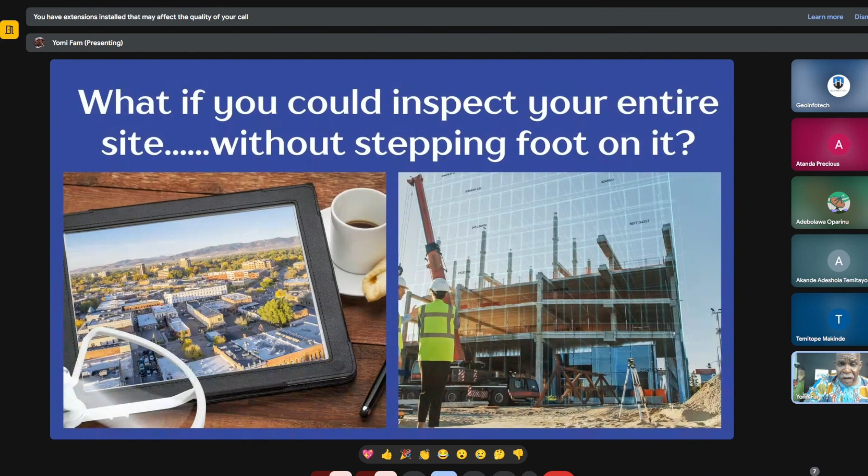Stand by. Okay, so basically here we have a slide of someone sitting in his office with a cup of coffee and what looks like a pastry. So what if you could inspect your entire site without stepping foot on it? I mean, that's every investor's dream, or every site manager's dream. Sit back, the drone flight is being sent to you live, and you can just basically see what's going on site.

Okay, so what kind of challenges do we face in construction in Nigeria? Very limited visibility of site progress. There are always delays, most times delays and cost overruns. There's safety risks on site. There's difficulty tracking material usage.

Drones can help fix all this, and we'll be going over a few of those challenges and see where the drones can actually come in and help out.

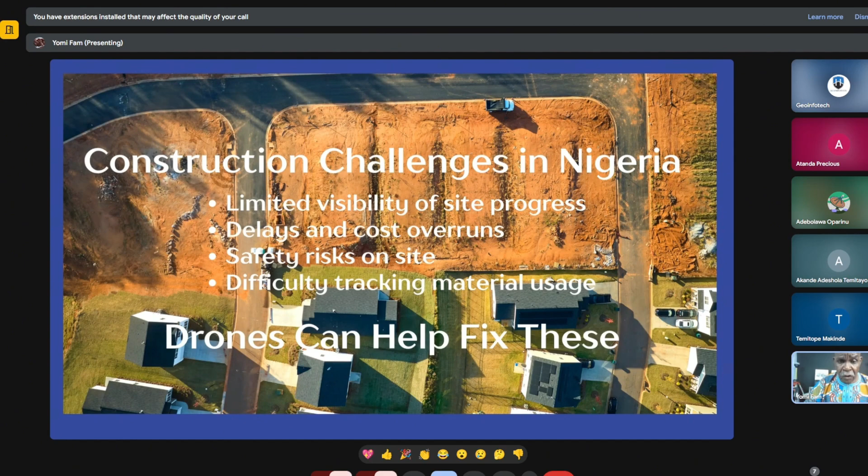Okay, drones are basically your eyes in the sky. What are drones? Drones are also known as UAVs, unmanned aerial vehicles. They capture high resolution images and videos. They fly autonomously or manually. Now, what I mean by autonomously is like you sit in your office, you get your, I'll be going over some of the apps that you're going to use for all these drone flights, something like DroneDeploy or Pix4D. Sit in your office, map your mission, preview it before you get to the site. Get to the site, put your drone up in the air, and the drone will automatically or autonomously fly the mission for you. But having said that, it's also very important that you manually know how to fly a drone, just in case when you get to the site, things change and your autonomous mission plan missed a few shots.

So while you're on site, you can go back and capture shots of those images that were missed. That's where the manual thing comes into play.

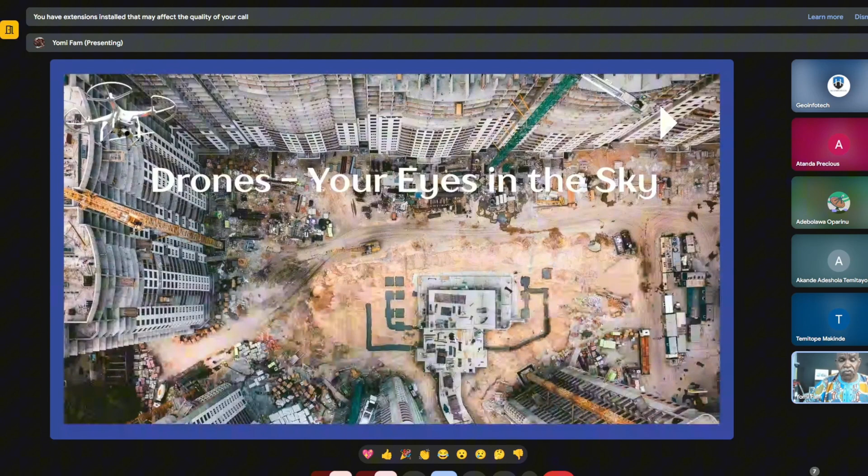Drones are equipped with GPS and high sensitive sensors. Drones are basically your eyes in the sky. I don't know how else you can get a view from that high out.

Where do drones fit in the construction site life cycle? You can have daily, weekly, and monthly site monitoring. You can do topographic surveys, take progress photos, generate 3D models, and do site surveying and planning.

You can monitor the progress on the site as construction goes on. You could monitor that progress. You could do material management. What do I mean by material management?

Basically, on the site, one of your contractors says he delivered 10 truckloads of gravel or sand, but he only delivered 9, or each truck wasn't full—it was like 90% full. Well, the drone is up there. You just have to make sure that when he delivers the gravel or sand, the drone's taking a picture of what's being delivered.

You could also take stockpiles after he's dropped off the commodity on the site. You could do centimeter precision measurements of, okay, this pile here yesterday was 2 tons worth of material. Today, something's been used, it's now 1.5. You can do that kind of material watching on the site.

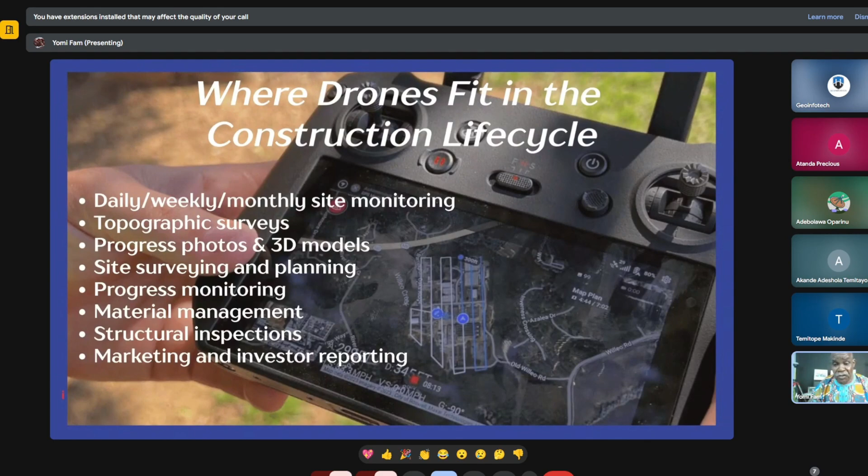You could also use the shots and deliverables to show the investors, okay, we said in 2 weeks' time we're going to get to stage B of the plan or the building, and you could show the investor, yes, we're on time. And if you're not on time, you could always explain to the investor why. One important thing you could also do is take the site progress monitoring.

As you can see on the slide, this is a drone taking a shot—looks like the foundation has been laid—and this is a before picture that you can show your team, the investor, or whoever needs to see what's going on site.

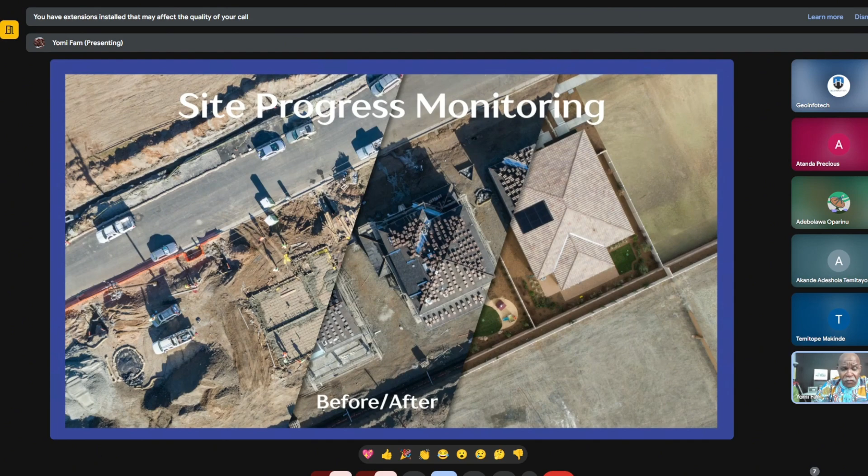You could also put the pictures side to side, showing the before and where you're at in the construction stage. It comes in very handy. 2 weeks ago you had the left half of the construction, 2 weeks later you're here. So it gives everybody peace of mind that the site manager, architect, or structural engineer is following through on what they promised.

Why use drones in construction? Key benefits: speed, safety, and accuracy. You get faster and more accurate surveys, improved safety monitoring, visual reporting for clients, and lower labor and inspection costs—very important for investors. If you can lower your labor and inspection costs, so be it.

I know for a fact that sometimes with really large projects, the owner of the building hasn't come out of pocket himself—maybe he's gone to a bank to get a loan. Most times, maybe not so much in Nigeria, the money is released in tranches. In other words, one week you say you're going to do X, Y, Z on the site. They will not release more money to you until you prove that you've completed that first part.

So that's where the inspection comes in, and by having a drone, it's practically very difficult for a human being to get into some of these inaccessible areas of a site, and pretty dangerous.

They are completed by professional building surveyors who are trained in building pathology. They capture detailed imagery of otherwise inaccessible locations. You get closer to the survey target, which improves the quality and density of scan. Completion is faster due to ease of access. They reduce health and safety risks. Very important, no plant shutdowns are required for a drone survey.

Most of the drones, although sometimes you have to get permission from the client and let them know you're going to be flying your drone over people. But the law does say that as long as you don't have a sustained flight over people, you're good to go. And you could do that while people are working, as long as they give you permission to do that and let them know what you're doing.

They provide a more thorough overview of a site. Don't need any explanation there. They are more cost effective than traditional surveys, definitely.

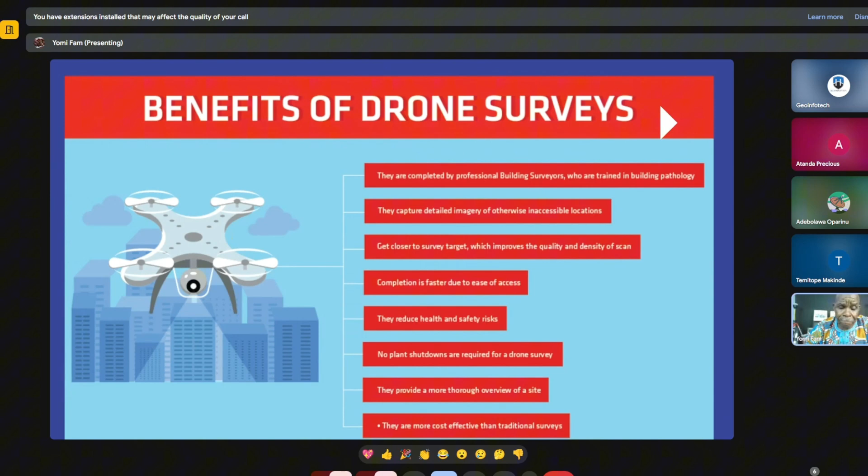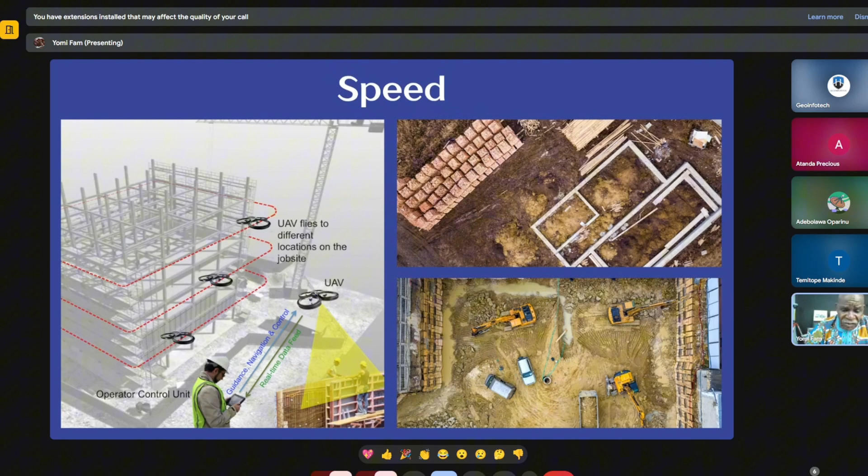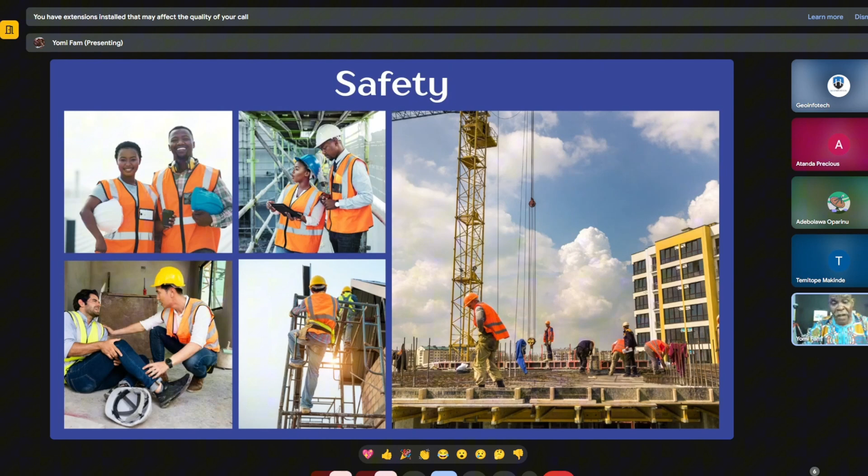If someone falls, or a brick falls on someone, at least you're covered in the sense that oh, all my workers are well equipped. They're covered. Wearing the right safety gear.

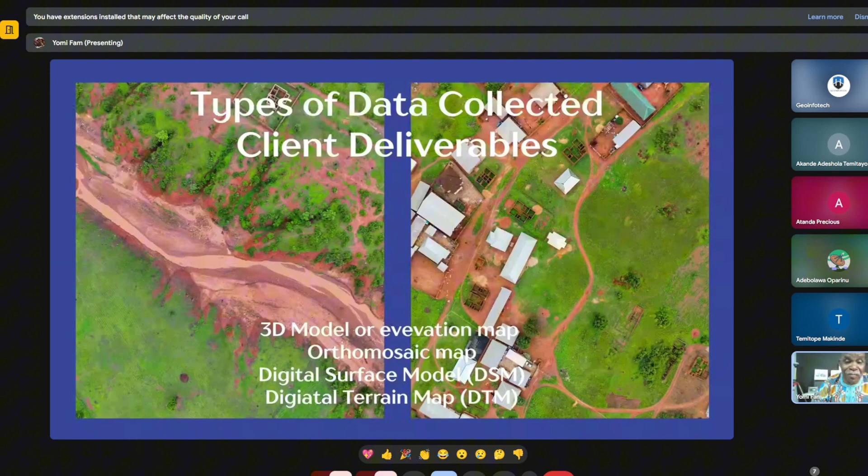Now, this is what they did on Niger State. They took all these maps, put it into the right processing software, came up with this that is going to be submitted to the authorities so that when they're planning in the future - a lot of homes got damaged, a lot of homes and lives were lost. So the authorities or whoever's going to develop this place can now take these maps and say, okay, water flows this way, this is where we're going to do our design, or this is how we're going to design the site in the future.

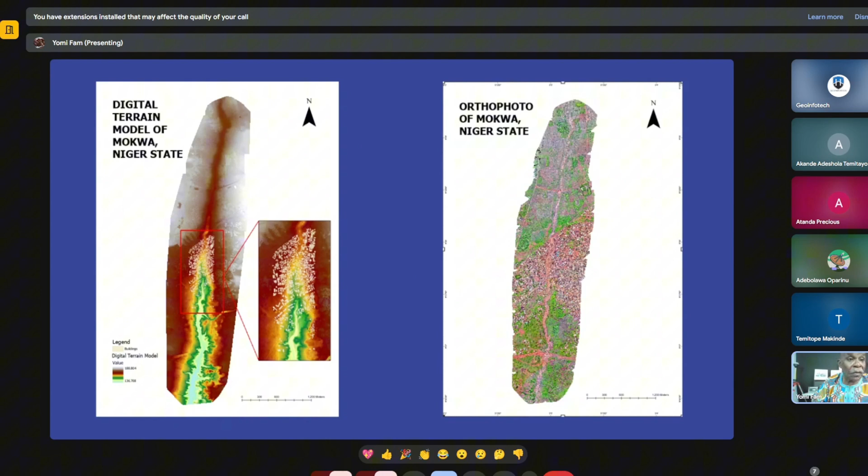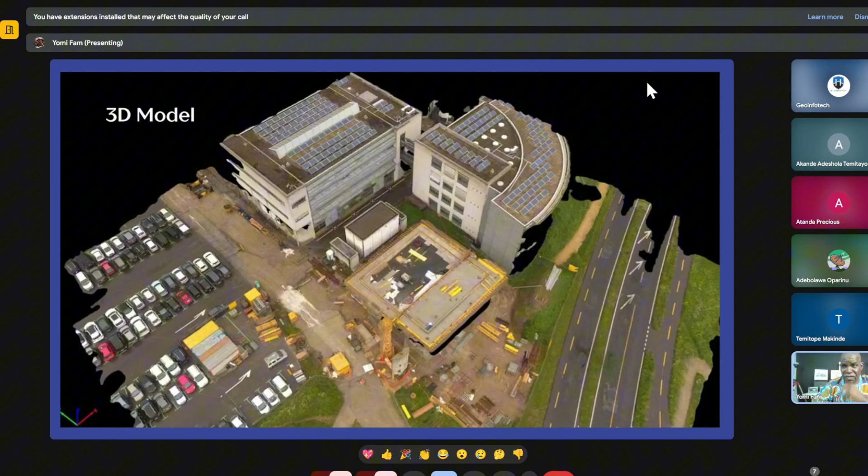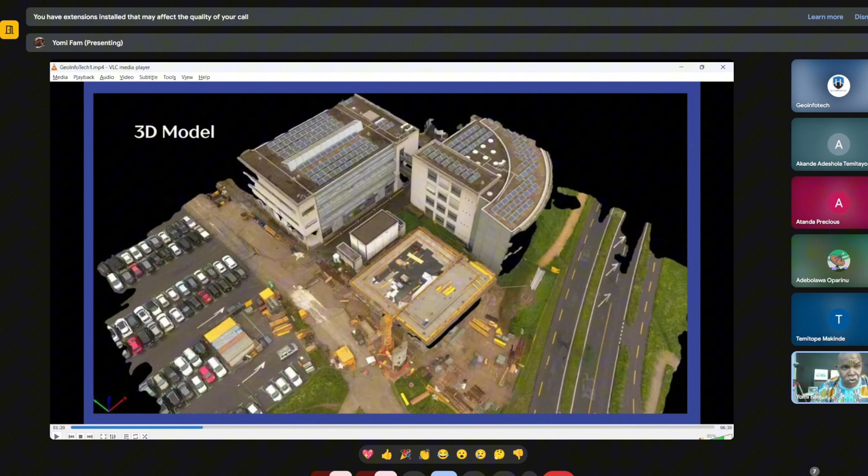So what's an orthomosaic map? It's basically you using your drone and pointing your camera straight down. Some softwares will say 0 degrees, some say 90 degrees, but basically it's pointing your drone camera right down, so you don't see the sides of the building. It's just taking everything from straight above.

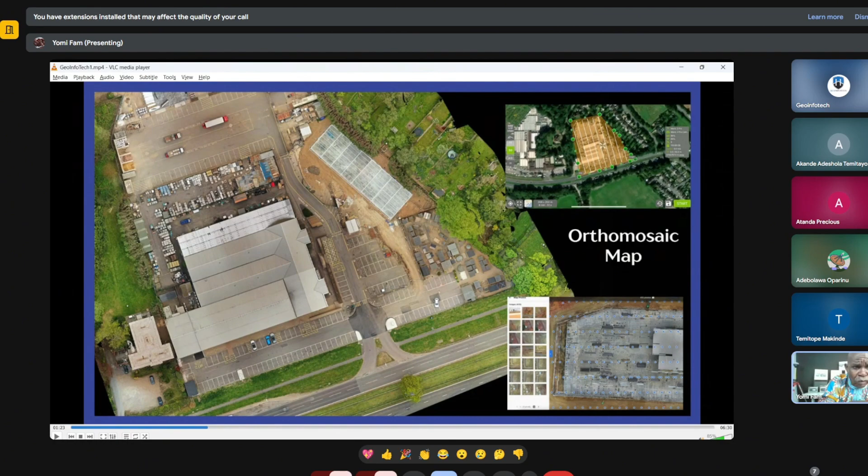If you look at the bottom corner - no, let's go to the top. The top part of the slide shows the mission plan. Again, I think I've spoken to you about what a mission plan is. And the bottom right shows where all the photos were taken. Those little blue dots are where images were captured by the drone.

At the end of the day, depending on how detailed your client wants your mosaic map to be, you're going to get several photos like the ones on the left. The ones Geoinfotech did a couple of weeks ago for Niger State - they did in excess of 400 photos, and all those photos had to be stitched together, and that's how they were able to come up with their maps.

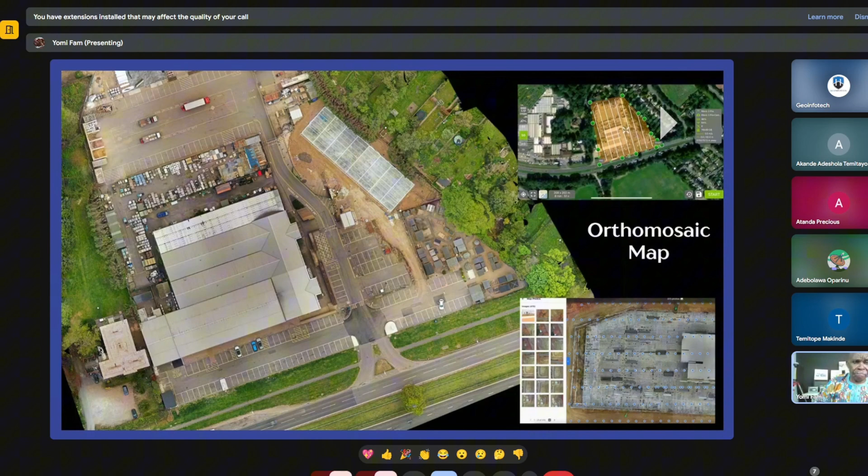Okay, moving right along - technology behind the scenes: drones, survey equipment, and software. So basically, whether you're getting into the business, already in the business, or looking to talk to Geoinfotech to see how they can assist you with your project - if you're just starting out, I'm not going to sugarcoat anything and tell you that it's pretty cheap. Of course you can buy one of those cheap drones, but is the cheap drone going to do the job for you? I do not think so.

So basically, all the drones that we use here at Geoinfotech are also RTK equipped. RTK is real-time kinematic - it's basically you taking detailed pictures of what's going on on site. Now, the experts say you should always combine your RTK with your GCPs, which is the ground control points. That's the best way to get your precision, or centimeter precision, maps.

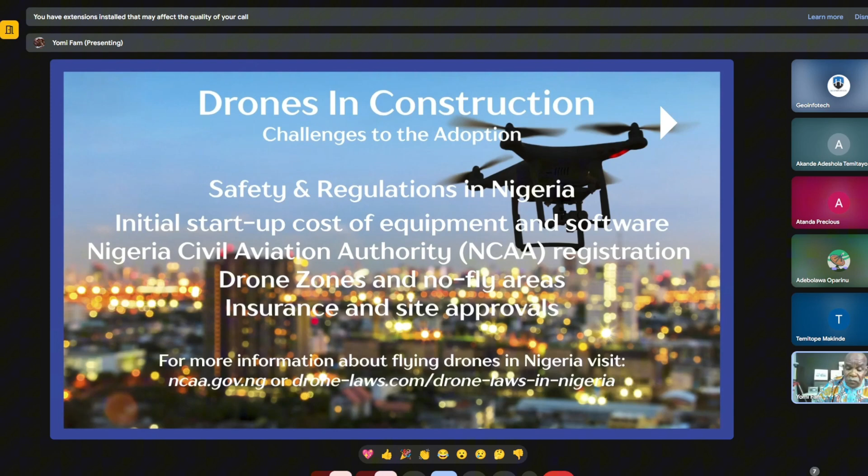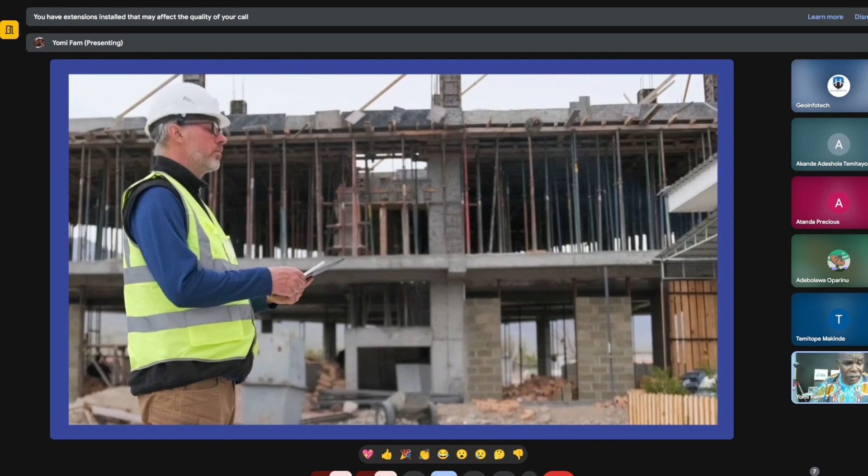I'm practically rounding up now because I don't want to keep going on. I could spend days talking about this stuff, but I've kind of just summarized it. Again, all this stuff that I'm talking about is going to be recorded, and you'll have a chance to review it in your own time. And if you have questions at the end of the session, we'll be more than happy to answer those. Plus, you can refer back to the webinar and then follow up.

So this picture here practically doesn't have anything to do with drones, but just watch. This is a guy on the site, and what is he doing? He's taking notes, old school guy taking notes. But watch his face at the end of the clip. That doesn't look like somebody that's too happy about what he's doing. I am yet to find a drone pilot that doesn't have a smile on his face, because it's not easy work, but it's enjoyable because you can actually see the fruit of your labor. This guy here, oh no, I wouldn't want him to be my site manager.

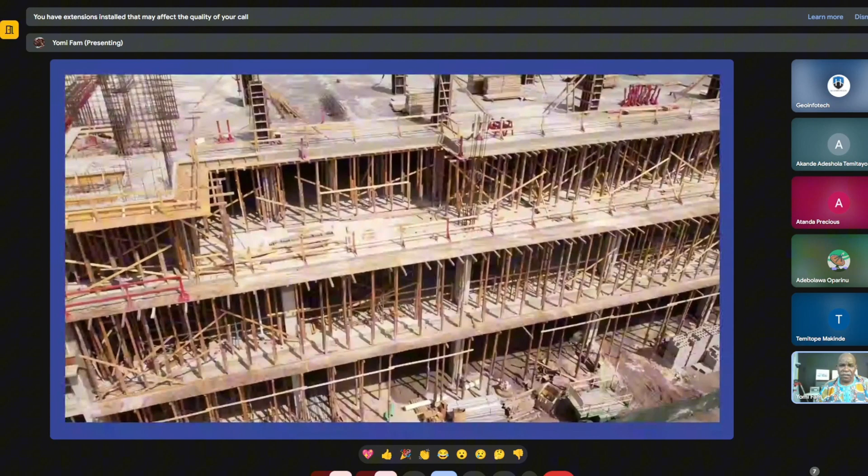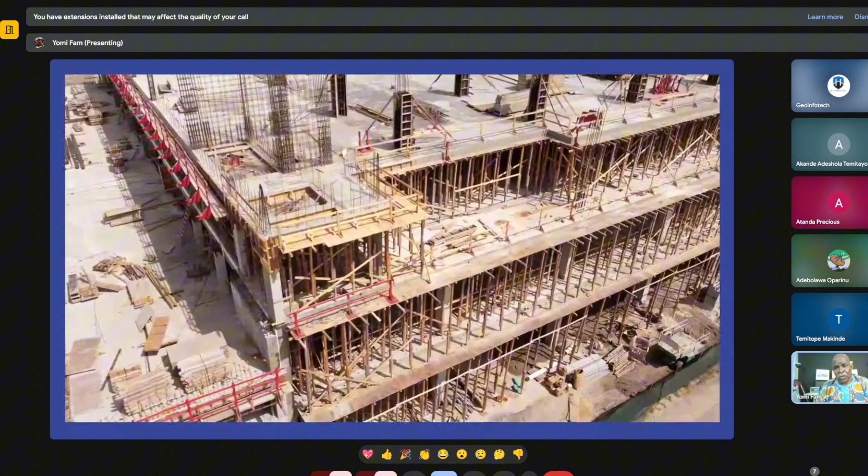Moving right along, we're just showing drone shots of construction sites. Now, I don't expect all your sites to be this large, but who knows? With Geoinfotech behind you, you can do everything.

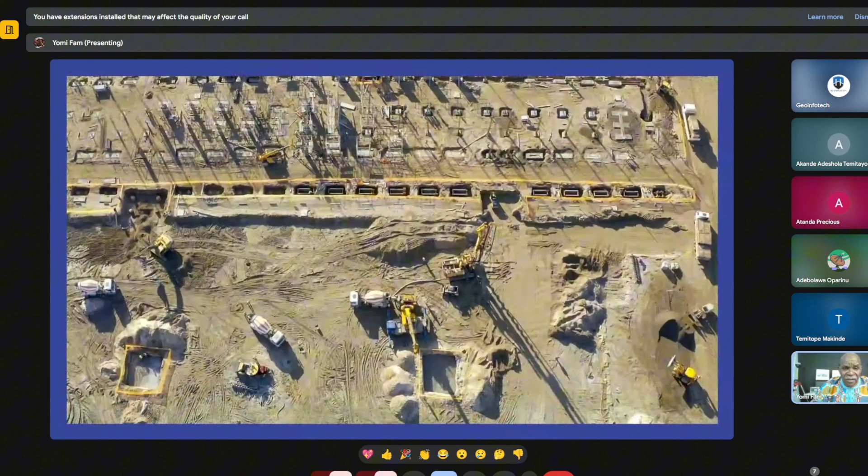This is a site where you practically see sand or gravel piles. Now, if you're using GCPs, or RTK drones with RTK modules on them, you can actually take measurements of stockpiles. So your site manager says, 'Oh man, we're running out of sand, or we used up half of the sand we need for the site.' You can always go back to some of the progress reports or progress pictures that were taken when this stuff was delivered.

One week later, there's only 50% left. What exactly did you do with the 50% of the stuff that you claim you used? Those kind of questions.

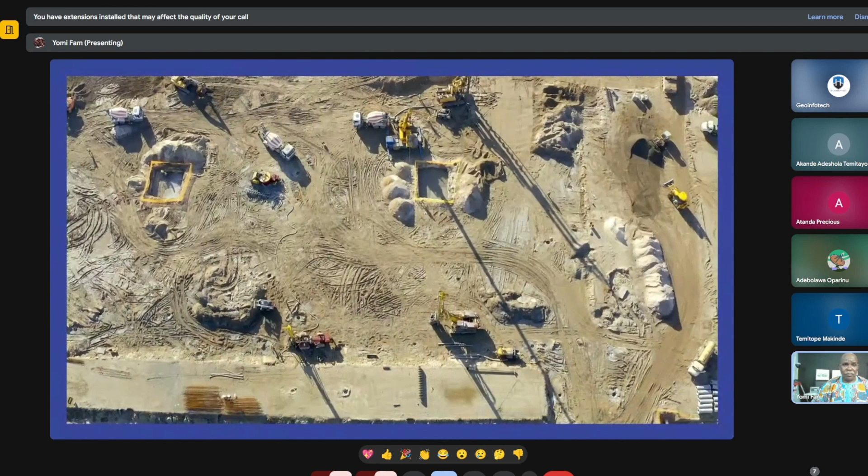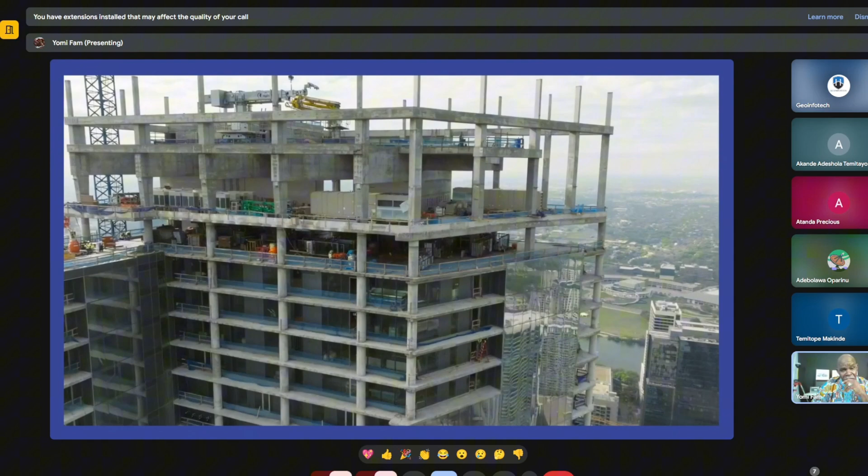So that's basically showing what's on site, the pre-construction. They've already started laying out some slabs here. This is another big one. I don't know if you could imagine monitoring a site like this, having individuals do it manually. Well, you might have to, if your company is rich enough, get a helicopter to take these shots. But basically, with drones, you could do anything.

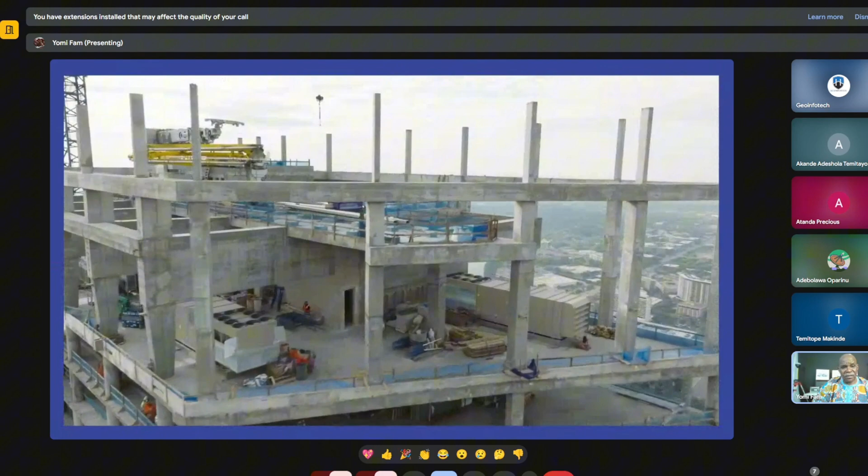Okay, it's basically zooming in, and going around and showing you what's going on. Isn't that a beautiful shot of what these drones do? Here also, you can see what's going on.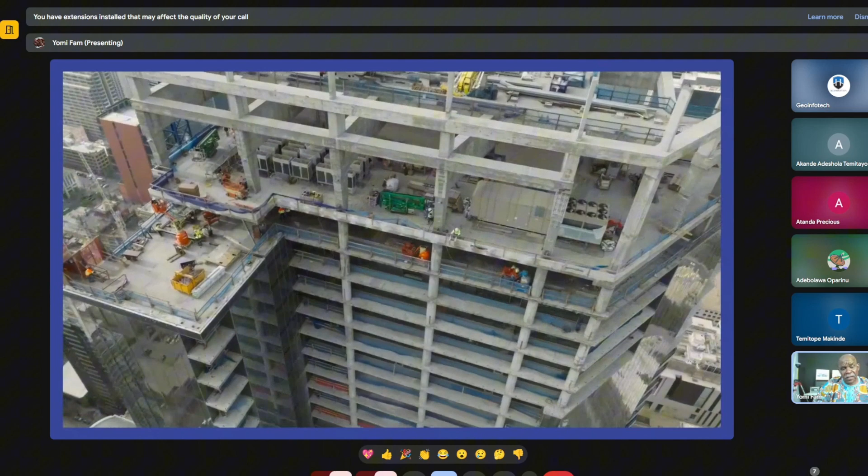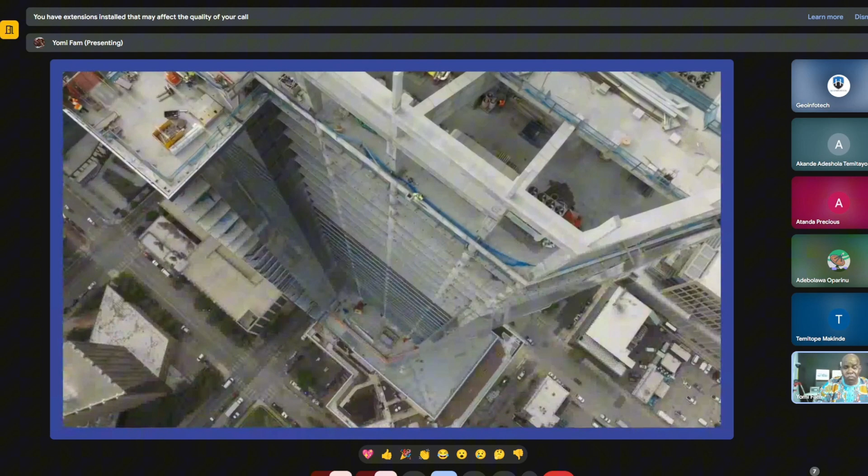Oh, by the way, we're taking shots of the exteriors of these construction sites. If you need to see what's going on the inside, we could also do that at Geoinfotech. Lots of drone pilots only take shots of the outside of the building. We can also take shots of the inside, so you can make sure that the pillars or columns or whatever structural stuff out there is placed right, the right width, that kind of stuff. Okay, so you can basically see all the AC units or air units, where they're placed right.

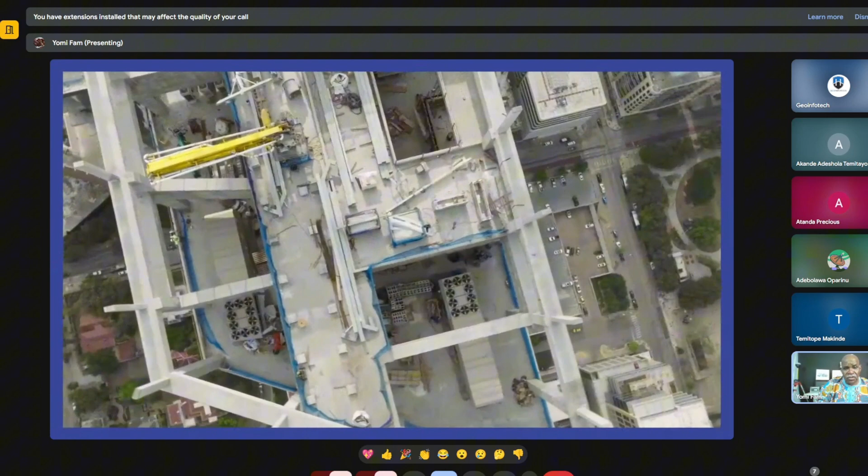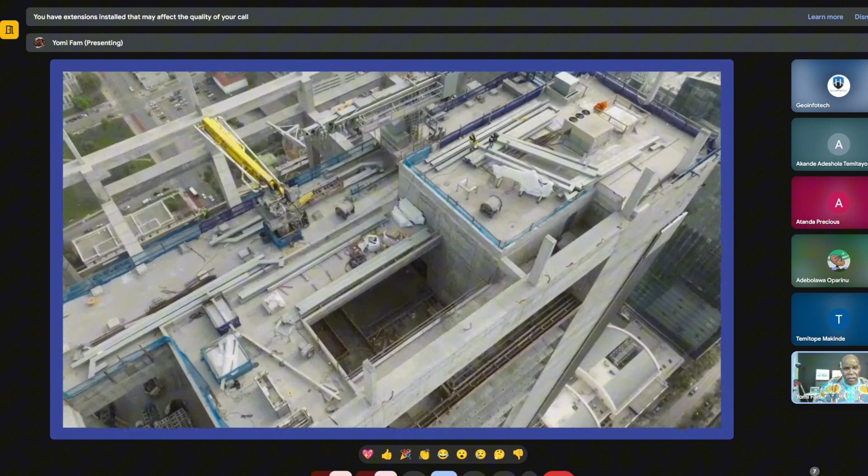Okay, so that's basically it. We're coming to an end, so please bear with me for a couple more minutes and we'll be done with my presentation.

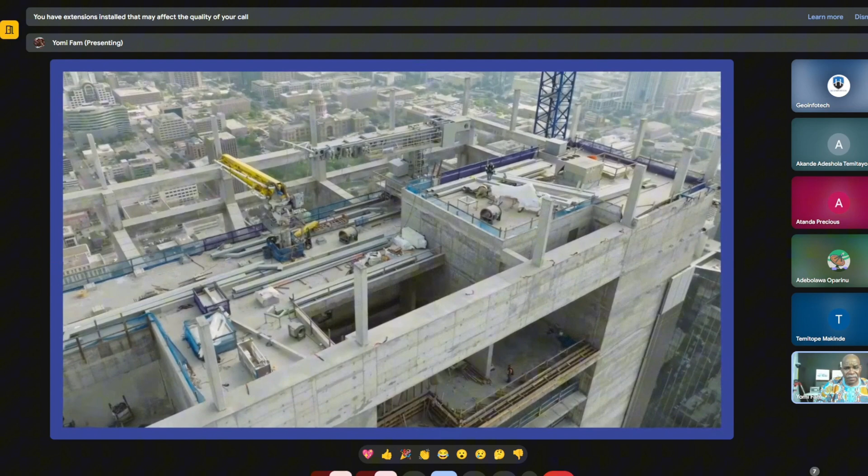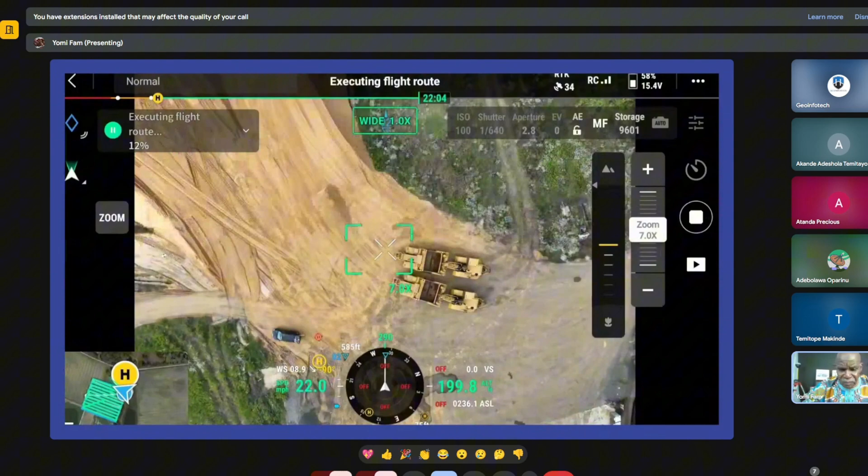Basically, this is a site, and I left the audio on this one because you hear this. Hold on a second, trying to get this. You hear those clicking sounds? That's the drone taking pictures at precisely predetermined spots on the site.

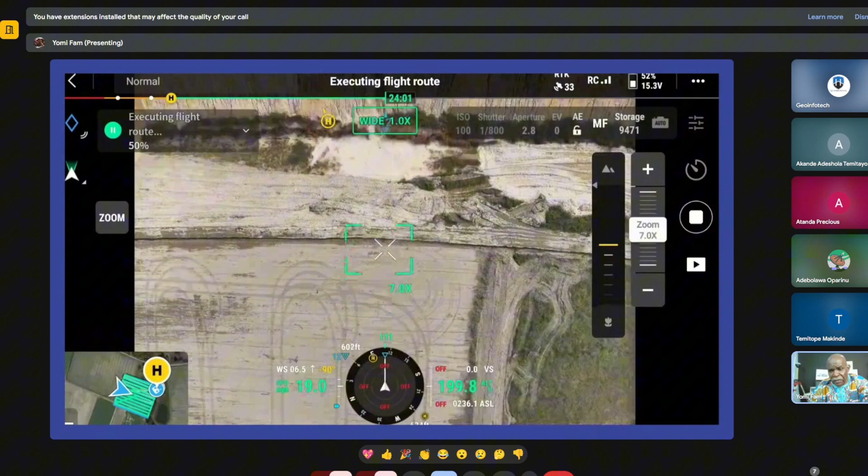If you look at the bottom left corner, that's one of those mission maps that you've already pre-planned. So basically, you get out to the site, put the drone in the air, and watch what happens at the bottom left. The drone is taking pictures at maybe every 1 second. Watch what happens now. As the drone turns, you see it's still following the pre-planned map and it's taking pictures along the way.

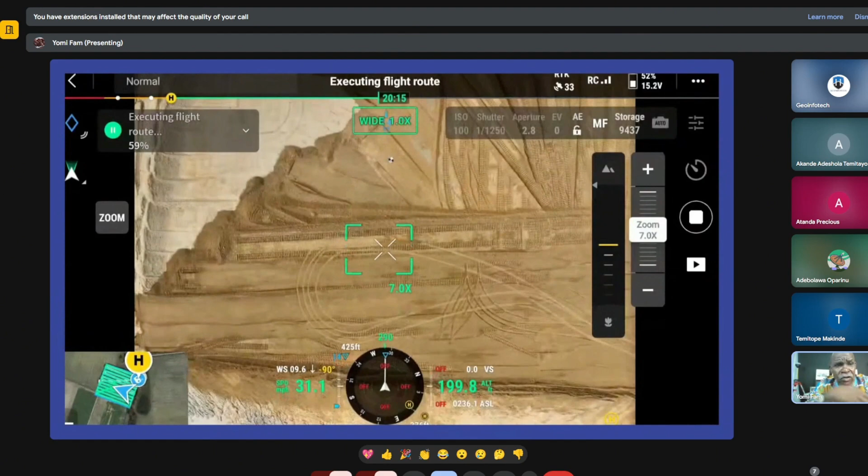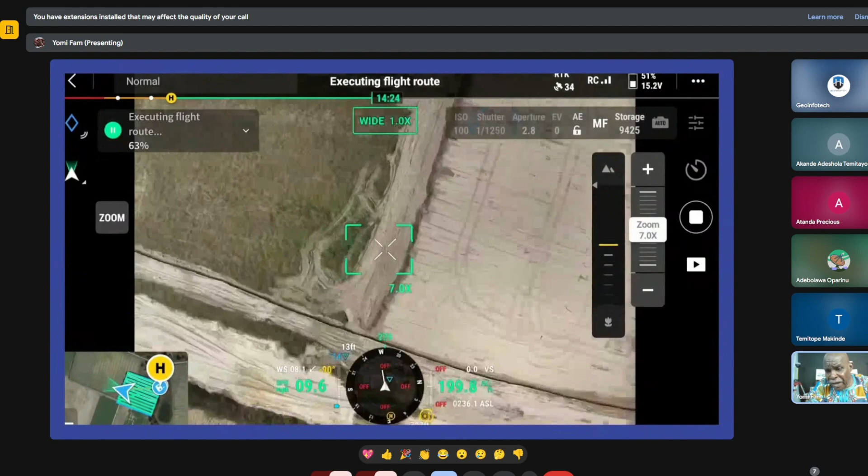Now, I'm not going to finish all this site, but as you can see, in this particular software, it's showing you how much of the pre-planned map it's done. Right now, it's at 57, it's at 58%. And so basically, you can control everything that's going on in your data capture software. Okay, so I think I fast-forwarded it a bit because I didn't want to bore you with this, taking you through the whole 100%. We're at 66, it should be coming to a closing.

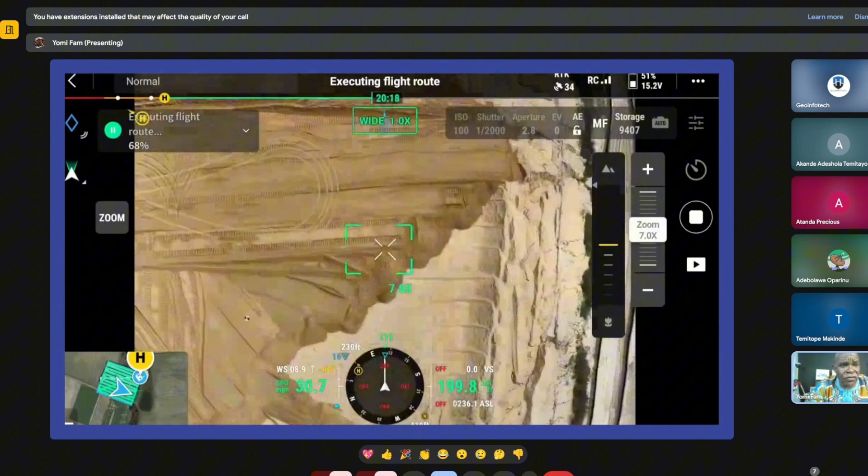So basically, look around the screen and you can see all the settings that are going on that you preset on the drone. And as the drone is moving, it's taking more pictures. I basically take my pictures every 2 seconds, but it's basically up to you. If you want to create 1,000 photos, that's up to you.

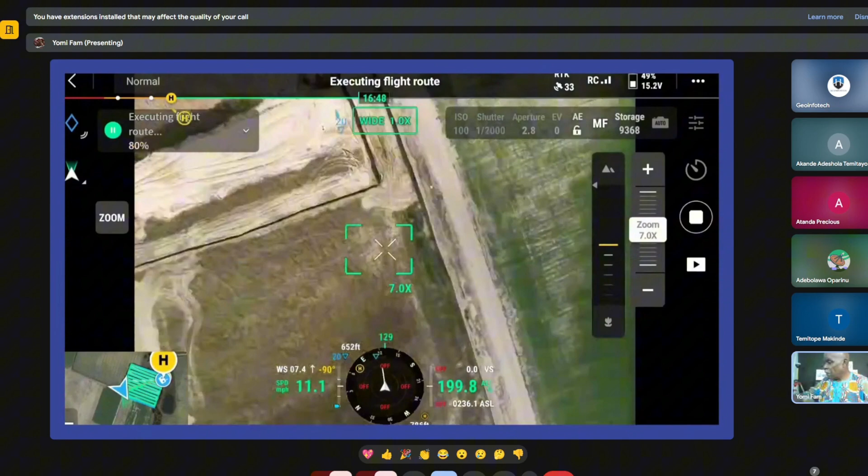Yeah, I'm going to be rounding off in a minute, so I'm going to fast forward this a bit. We're almost done, we're almost there. It's coming to a close. We're at 95%, and at the end of the mission, let's see what happens. 97, 98, 99. It's going to say something.

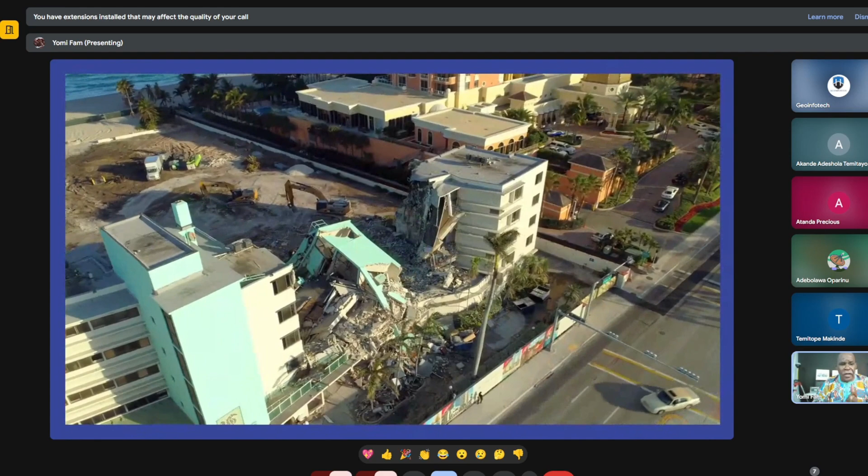There you go. Here is a site in California that was damaged by earthquake. They want to rebuild, and at the back of this collapsed building, they want to put on some other structure. So basically, your drones can go out there, determine what the damage was, and then report back to the developer on the extent of the damage. Okay, that's right by the ocean.

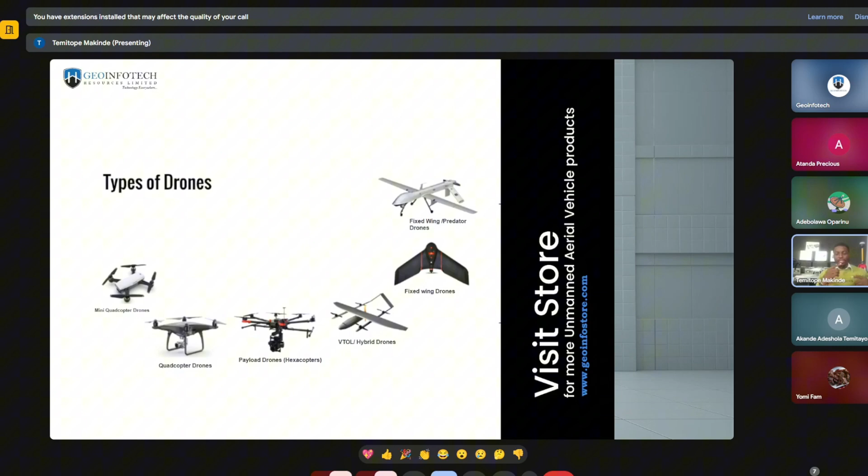Then we have drone and sensor. This is where a lot of drones are used for different purposes, different missions. We have the electro-optical camera for high resolution visual, and the infrared, which is for heat signature.

There was a time we were surveying a site just to detect areas that has high level of heat signature. You can't use that with RGB or normal photogrammetry, because you need a different payload for that.

Then we have the multispectral sensor, which is very good with agriculture areas, whereby you can check the health of the crop. Then we have the hyperspectral sensor.

Hyperspectral sensor is not common. A lot of us don't really see that in markets. This provides spectral data for material identification, and this is some of the things we'll be diving into.

And we have LiDAR. LiDAR is best for detailed mapping, especially where we have forested environments, so that you can get the bare earth surface while you still have tree and vegetation cover at that area.

They have GNSS. This is also a system embedded with the drone to ensure precision while capturing your data, so you don't have to capture data without precision. As you're capturing data with the GNSS receiver, it gives you more accuracy to your data set, so you're getting good data sets while also getting correct precision.

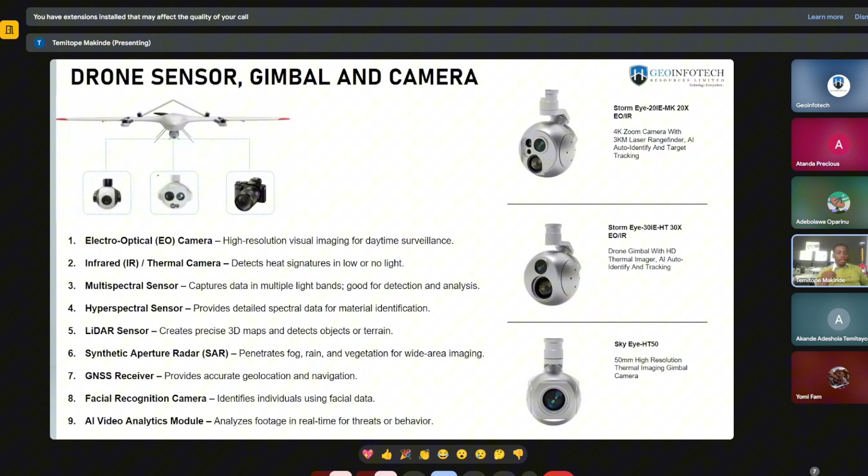And we have the AI video analytics module. We've recently seen it in the Matrice 4, which is bringing in AI system into the drone, whereby it makes the drone smarter. A lot of people are doing a lot of AI stuff, and this will actually increase the value of this hardware itself.

So I'll be listing a lot of drone data sets that you'll be getting for the mining sector and also the construction sector. One of the common data sets is the elevation models. The elevation model helps you determine the topography of that site.

This model is in the format of a raster, more like an image format. We have the DTM, the digital terrain model, and the DSM, the digital surface model. The difference is that for DSM, if you are getting an elevation model, you are getting elevation of man-made features and earth features, like the elevation of trees, buildings, and any other object around the site.

But the terrain model gives you bare earth elevation, just elevation of the earth surface, excluding the buildings. So in case you want to demolish a lot of buildings and don't want to waste money demolishing areas that are not really necessary, you can do the DTM. It will give you the elevation of the area excluding the buildings, as if there's no building there.

While the orthomosaic is just the true image of the site, mosaicked into a single image. I will give you an example of this as we proceed.

Then we have the true image of the area, more like the map of the entire area. Just assume you have Google Earth imagery, you see everything within that site, but this one is in the form of a drone image.

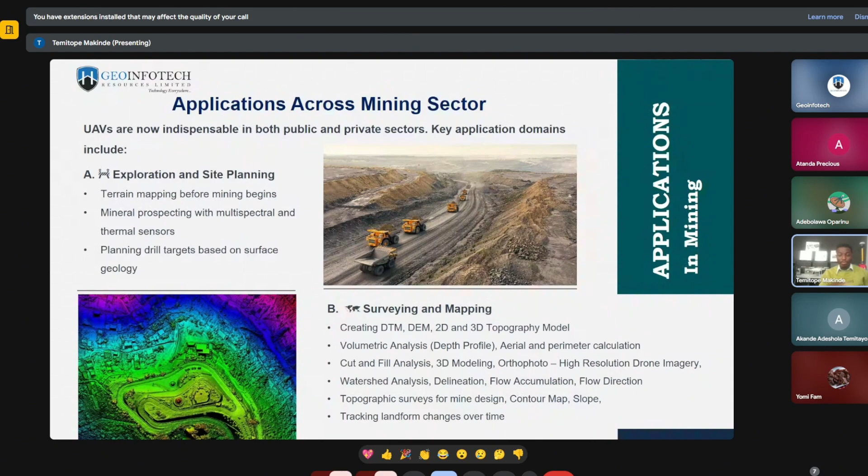Now we have stockpile and inventory management. This is one common part within the mining sector.

You can see here we have previous data and calculations whereby we brought in past projects, processed these data sets, analyzed them, and calculated the volume of this pet coke. Pet coke is a raw material commonly used for cement, and is more like a waste product of petroleum. They use this in combination with other minerals to get results. Without you going to the field again and spending hours, these data sets can give you a lot of information, including the analysis calculating the volume.

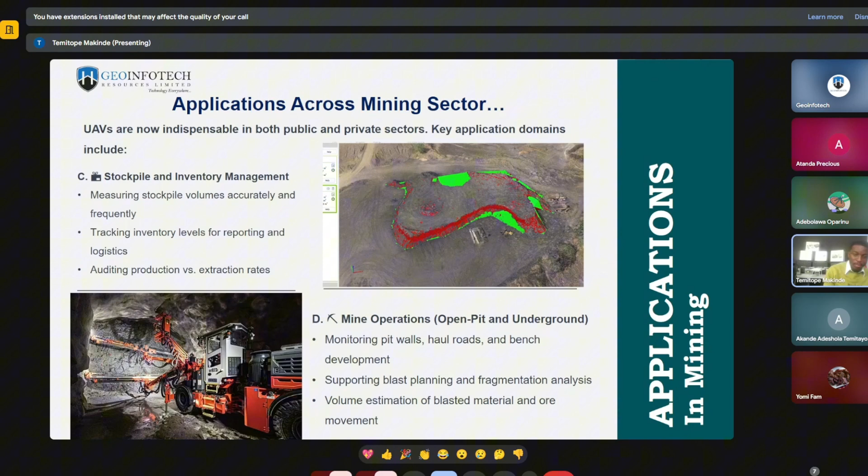So you can measure stockpile volume accurately and frequently. With this, you can know how much volume is remaining in stock, and know if you've not been cheated. In the office, you can calculate this with a simple tool, the Pix4D. You can track inventory levels and reports, and also compare with logistics.

Then we have mine operations. One thing about mine operations, especially underground, is it has high intensity for risk. You can send a drone to survey the entire mine and create a 3D model, understanding the terrain before going in. This lets you monitor pit walls, haul roads, and bench development. You can also support blast planning and fragmentation analysis, and calculate the volume estimation of blast materials and ore movements.

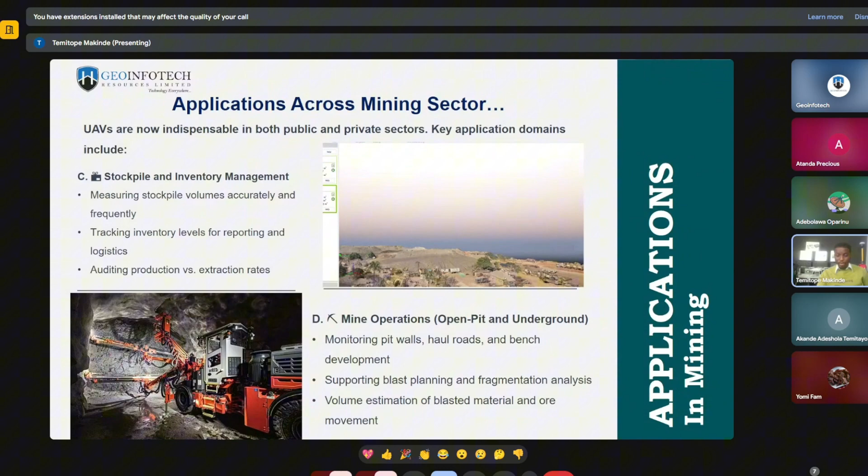The next thing we have here is stockpile and inventory management. It's related to what we did before. You can use this for calculation of different inventory levels and also for auditing reports within the organization.

The next one is environmental monitoring and waste management. With this, you can inspect different cracks and seepage, deformation, or monitor rehabilitation efforts and vegetation growth at the site, and study water quality within that site. A lot of things this drone can do for you without being in physical contact with it.

One important thing to notice is that you can get results of about 15 surveyors or GIS field workers on site using just a drone. Anytime you're flying a drone, you just need a co-pilot and a person in command, the main pilot, or the visual observer. You have a visual observer, a person in command who is the pilot, and maybe a person manipulating the control. So you have three guys capturing detailed information on site, and this is transformed into a digital copy or digital data set that can be used for multiple results.

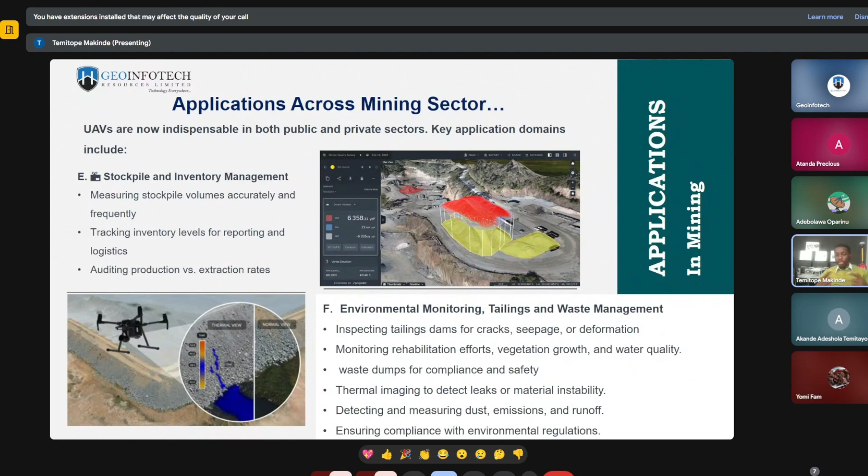Then we have infrastructure monitoring. You can monitor infrastructure over time to see development, and with this you can also study if there's any mistake. Without monitoring and archiving these data sets, you can't really tell what happened before. Understanding this can also help track the development level and predict the level of completion. There's an analysis where you can study what has happened before over time, and also understand what will happen next. Based on the timeline of the project, you can identify where damage and maintenance needs attention without shutdowns, and you are working with precision and being smart at what you do.

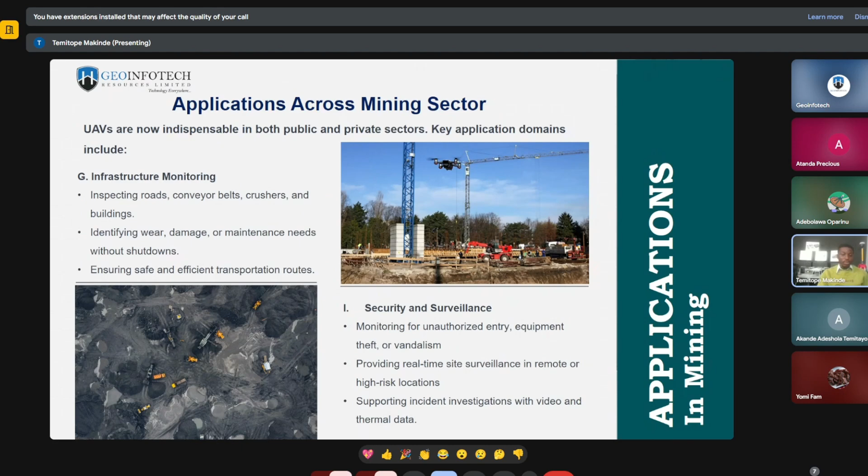LiDAR comes in place whereby you have to get detailed volume calculation, especially when you're doing 3D modeling. LiDAR is very useful in that aspect.

Then this is the last one, which is safety and risk management. You are limited to where you can reach, especially when engaging yourself in the mining sector.

It's just like the masts. You see a lot of people climbing masts just to inspect a particular wire that is not connected properly. But with a drone, you can just send it up there with a very good camera resolution that can zoom. Not all drones can zoom, so you should know this. There are drones built for a specific purpose.

Drones that can zoom are mostly for inspection. Do you understand? Drones with automatic and manual focus and mechanical shutter are very good for mapping. They're also embedded with GNSS and RTK. They are very good for mapping, and you have a lot of them like that.

But a lot of people get confused. You get a drone that you see people using for content creation, and you also want to use that for mapping. You're not just endangering your drone, but you lack in quality. The results and reports you get from that drone will reduce in quality.

For health and safety and risk management, you can send this drone out there, especially in small holes or big holes. You can send it out there before you go in to inspect, to be sure it is safe before you can go there.

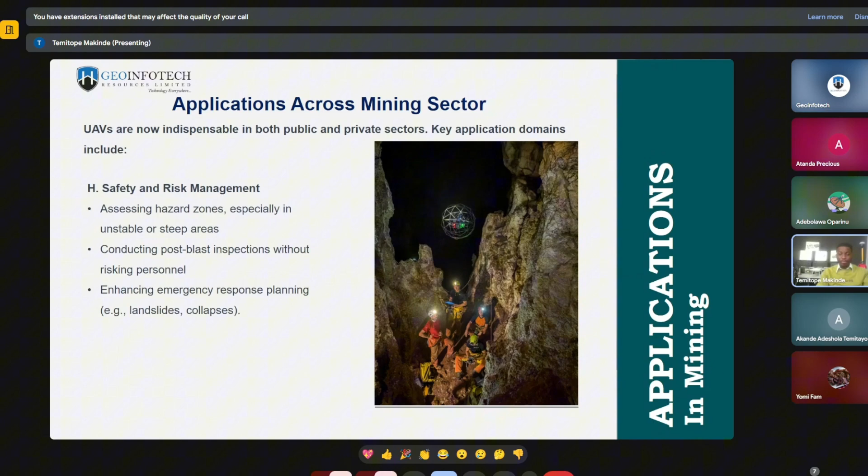So we have technical teams, especially when going to sites. Now, this is for those operating a drone department. You should always have a drone pilot and a security team. It's not everywhere you go that you just assume the drone pilot is safe with the drone just because he has it with him. You should always have a drone pilot with a security team.

You should have a technical support engineer in case there's any glitch on site. And you should have a compliance and safety officer. You should also have security and operations managers.

We also have other teams at Geoinfotech, whereby we have data analysts and GIS specialists, command operators, drone maintainers, and IT and network administrators. We also have security operators, managers, and emergency response personnel.

And this is me telling you areas you can fly and areas you cannot fly. In Nigeria, especially if you are familiar with DJI, there are areas you can't actually operate this drone. DJI has it embedded that you can't fly in restricted zones, especially close to airports. So anytime you're flying, always make sure you check the map, check the areas you're flying, and be sure you are safe to fly within those regions.

This is also telling you you're not allowed to fly at military zones, government buildings, or villages without warning. Especially airports, power plants, and prisons without warning. So as much as we're telling you drones are useful in this sector, we should also let you know there are some areas you are not meant to fly. Even if you are going to fly a drone there, you should let the people around know that you are coming to fly.

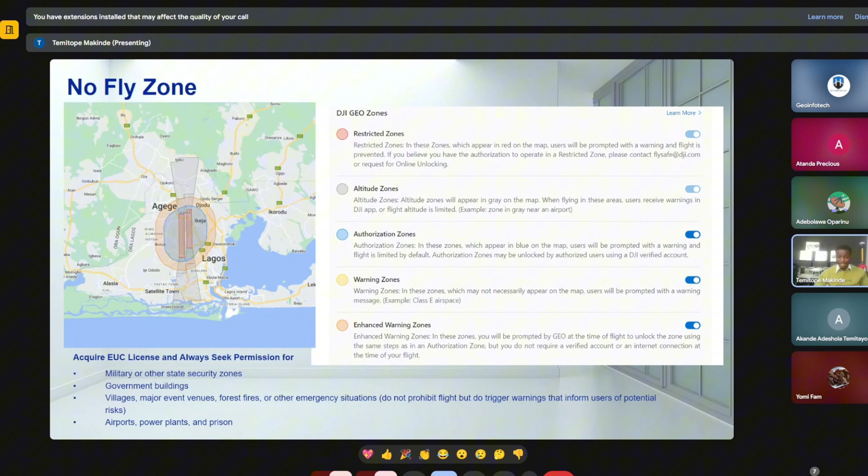So as much as this drone is very good, you can fly with this, you can do a lot of stuff, you can get a lot of data sets, trust me, 95% of drone operation is done with planning. Telling you, 95% of drone operation is done with planning. You plan the areas you want to fly, you check the weather.

You must always fly with the right direction.

If the weather is good, you should also know what is the tallest building or tallest object around there, for safety. You should also check if there is any prison, police station, post, army barracks, and all of that. Trust me, you don't want to get your drone into any of those.

So you should do a lot of checking. A lot of maintenance with your drone is very, very important. Check your drone, and one last thing, you should check the camera settings. Trust me, you can go ahead and fly your drone, but you might be flying and flying without checking the results you're getting, and you'll have wasted a lot of time. What we're bringing to you is time management, reduced costs, and quality results.

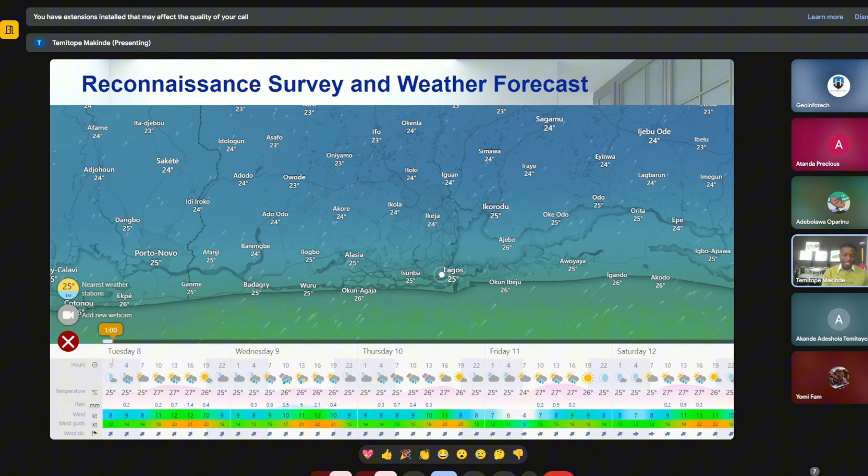If you're having any issues with your drone, trust me, make sure you get a drone that has return to home. There are a lot of drones out there without this functionality. Get a drone with return to home.

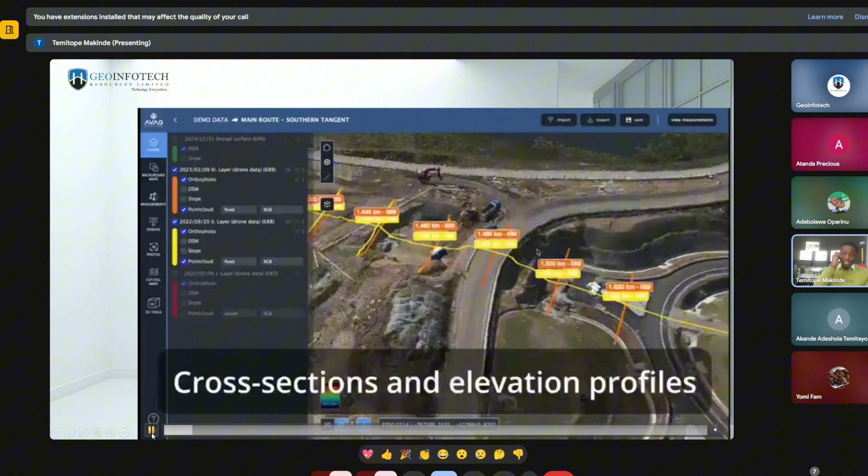This is another result you get from a drone - these are cross-sections that give you an idea of the elevation of that site. With this, you can understand the topography, understand what you can do with it, and understand the flow and pattern around the site.

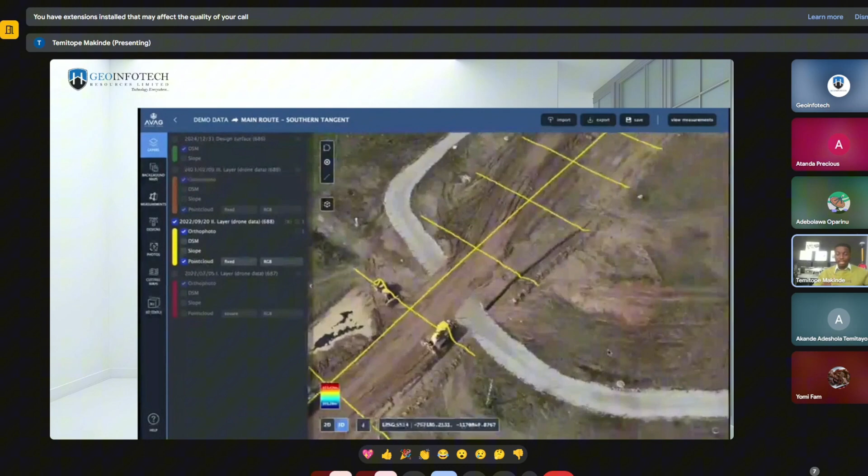This is one analysis you can implement and overlay on Google Maps or other software, giving you an idea of the setback within a particular route.

So I'll be displaying some of the results we get. Just a minute. All right, so there was a time we did a survey.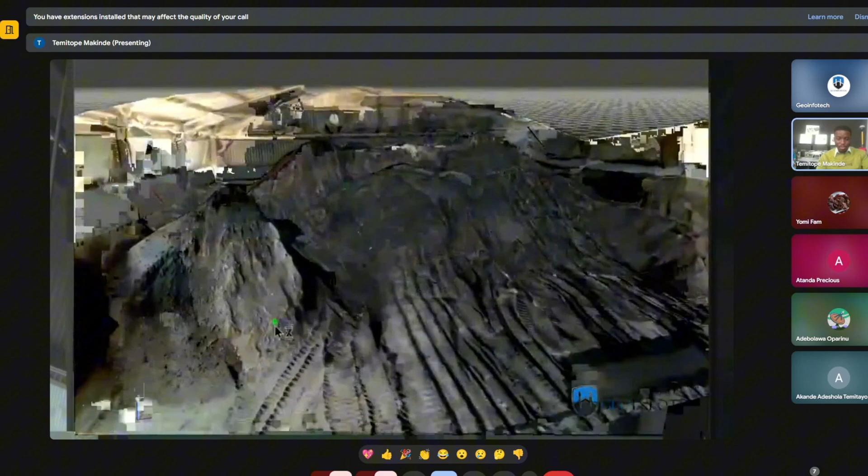The challenge we faced here was a lot. This was us flying the Phantom, and these were the results. The result actually came out well - we were able to calculate the volume of this material indoor.

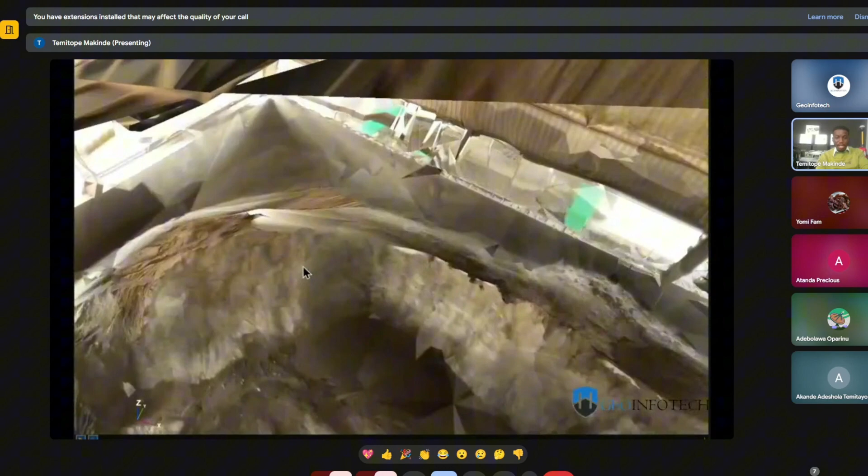Trust me, you can't do this with just a drone and differential GPS. The trick there is we have to use a total station. You can't do this with just a drone and a differential GPS.

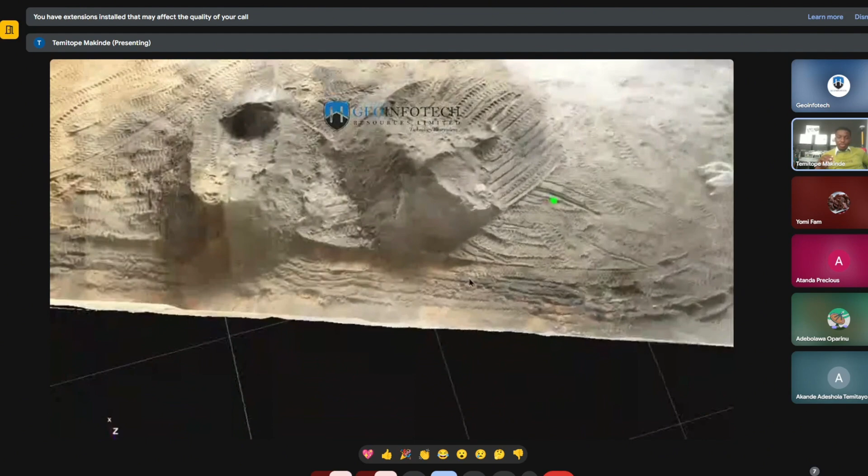All right, let me play this - sorry for the glitch you're seeing there. So this was us trying to calculate indoor. We were able to delete some of the other data that are not necessary, like the side walls and other things around it, so we were able to calculate the volume here without just measuring it manually.

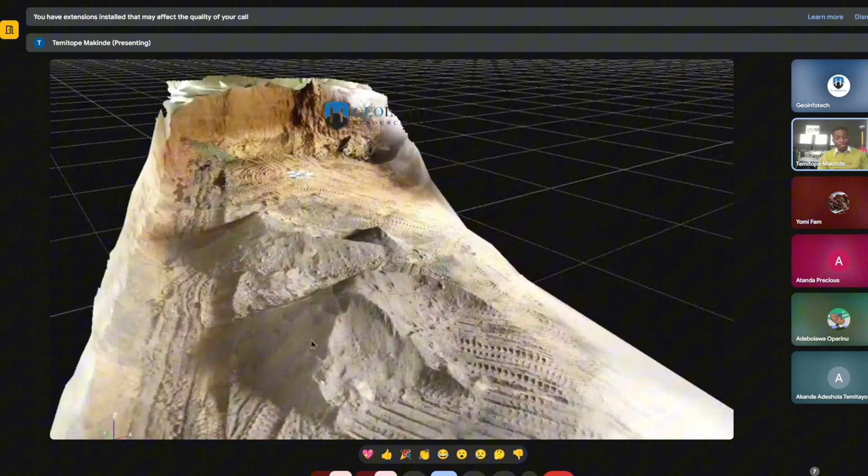But another thing is the more GCP - or shall I say, the more points you pick on site with your drone data - the more accurate your results will be. So we were able to use a surveying drone with a total station, and we also did a little bit of differential GPS to ensure accuracy and validation of the data sets.

With photogrammetry software and remote sensing software, we were able to calculate what we got here. I think this is for construction - let me see if I can pull this up. For every project you survey on site, there are a lot of results you get.

You don't just go ahead and get your orthophoto, your DEM, your contour. You might also get the pipelines that are there, the current features, manholes, routes, footpaths, and all of that to understand the full terrain of the site. Note that most construction site results get sent to town planners, developers, or architects to plan the site according to its use.

Now this is for construction, whereby we're able to get the topography. This was about 1,000 to 2,000 hectares of land surveyed within less than a week. We try maintaining accuracy especially with the pixel, and also the GCPs we pick on site. So there's height accuracy for vertical accuracy and there's horizontal accuracy, and we try maintaining less than 3 centimeters.

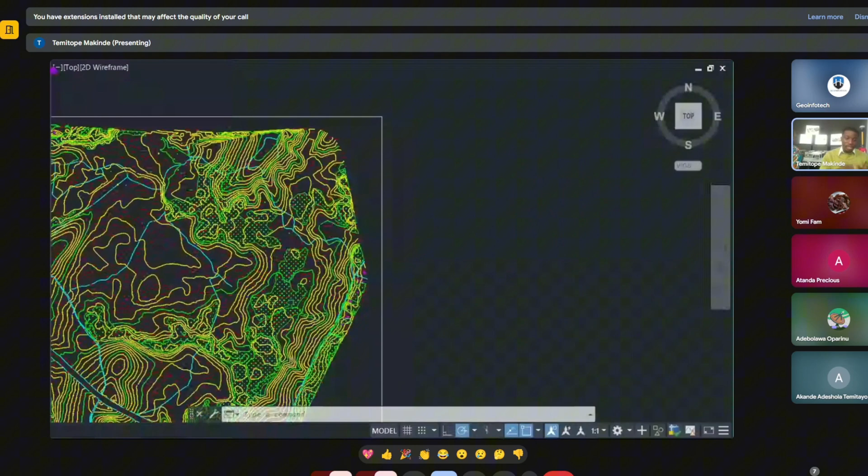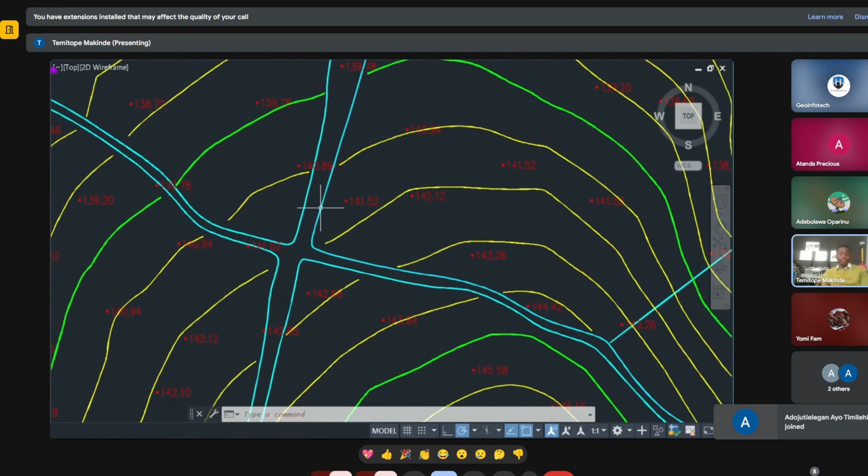With this you can get detailed information. And another thing most important within the drone industry that most people don't do is classification of features around there. You can classify areas currently covered by vegetation, areas covered with existing settlements, areas with just roads, and areas with forests and light vegetation. That is what other remote sensing software can do for you.

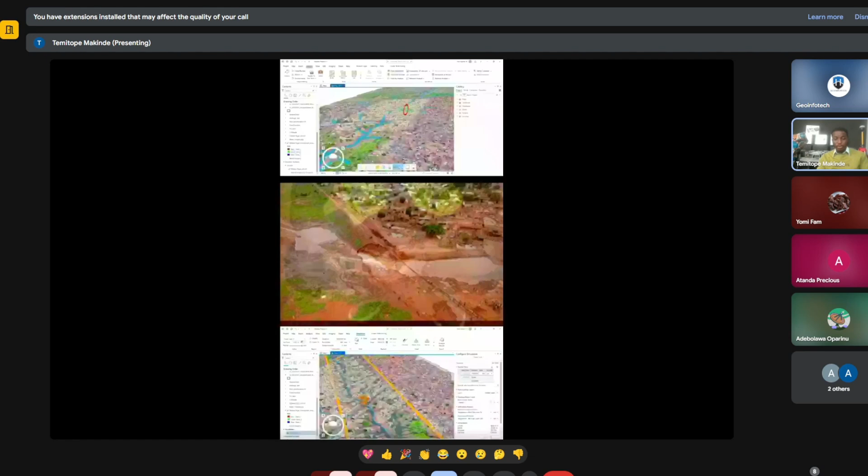When we observed this, we calculated a lot, and we did a lot of survey and analysis. You can see the 3D model that we were able to get. During the course of this flood, we observed that the water had accumulated because of the source of where this flood was coming from. Let me pull this up just a minute.

I'll be putting this up so that you can understand this is a live project that happened recently - sorry for what happened at Mokwa.

This is more like a live project which Geoinfotech voluntarily took upon to survey, to understand the cause of the flood and the source of the flood, and also we were able to survey and understand what the solution could be. So this is what GIS can do for you.

It can give you before results and after results, and current results. I'll be sharing my screen for the results we got on site and some of the reports we got on site as well.

During the course of the whole survey, we were able to ask a lot of questions from the indigenes about what actually happened. They told us that the flood did not come from River Niger, because you notice on that site we have River Niger there, close to the village, and the water accumulated actually around there before the flood happened.

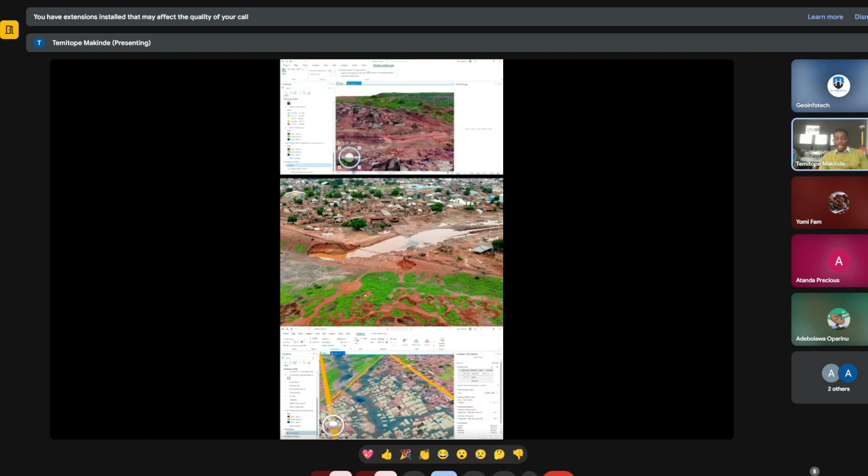Mokwa was actually lying on a slopey environment. From there, we were able to know that the water was washing from there, and you can see the damage and impact caused. It's washed off from there down to River Niger. So the force was coming from that hill.

So with this, we didn't just calculate the results and the extent and say okay, we are mourning them or whatever that. We also proposed a solution.

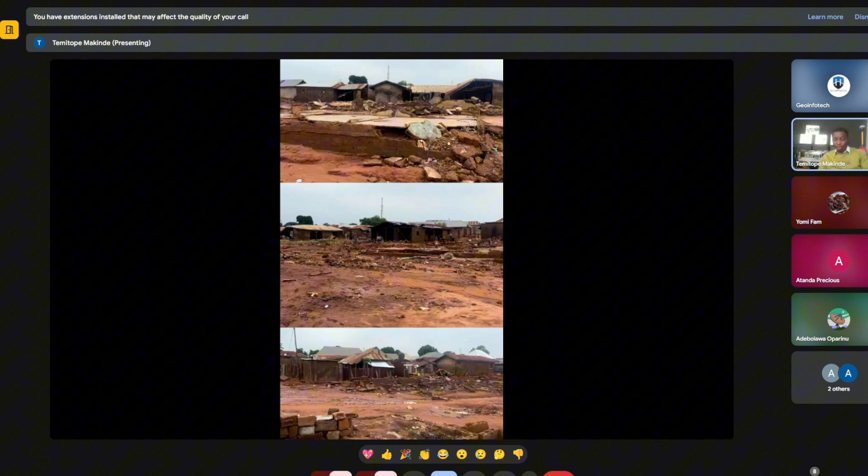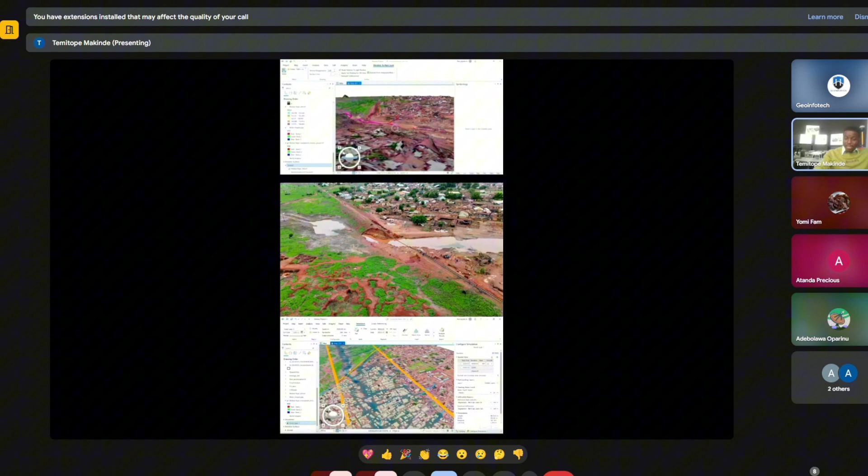From the survey we did here, we noticed that this place is actually best for creating a channel for drainage. If there's a channel for drainage along this side, it will limit the accumulation of water here, and there is no way water will just come and cause a lot of flood devastation around that area. So if they create a drainage channel from the local dam down to River Niger, trust me, there will be no issue here. And also with this result, they can do proper planning.

With this, they can do proper planning to avoid flood from happening in future. So I don't know if this has answered your question.